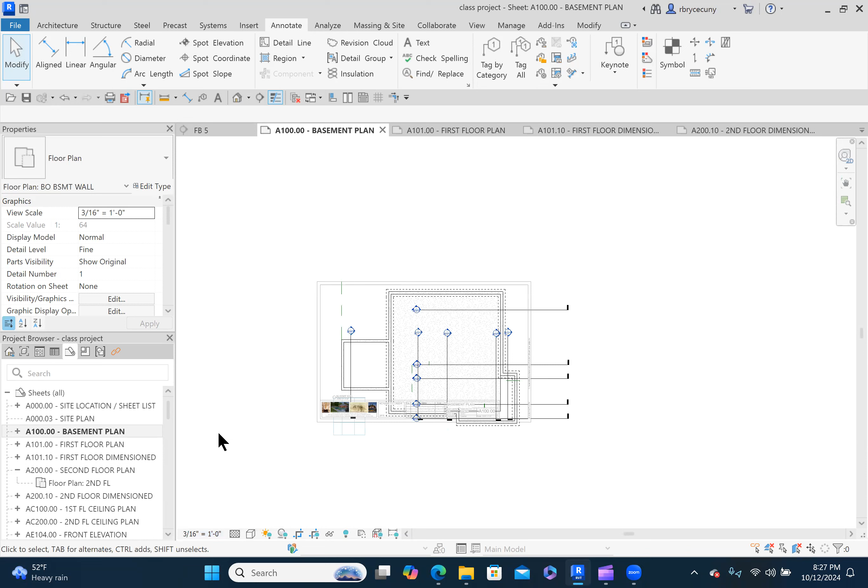So the first thing we need to do is activate the view so that we can make it smaller. So let's try 3/16. That's not going to work. So let's try an eighth. That will work. So deactivate the view. Raise that up a little bit. About to right there. We do have some cleanup to do because our section lines need to be

more organized. They're in the right location, but the ends or the beginnings, the arrowhead or the bubble needs to be outside of the building for sure. So let's do that. We activate the view. Let's grab this guy and pull him all the way over to here. And then we'll grab this guy. We'll pull him over and watch it snap.

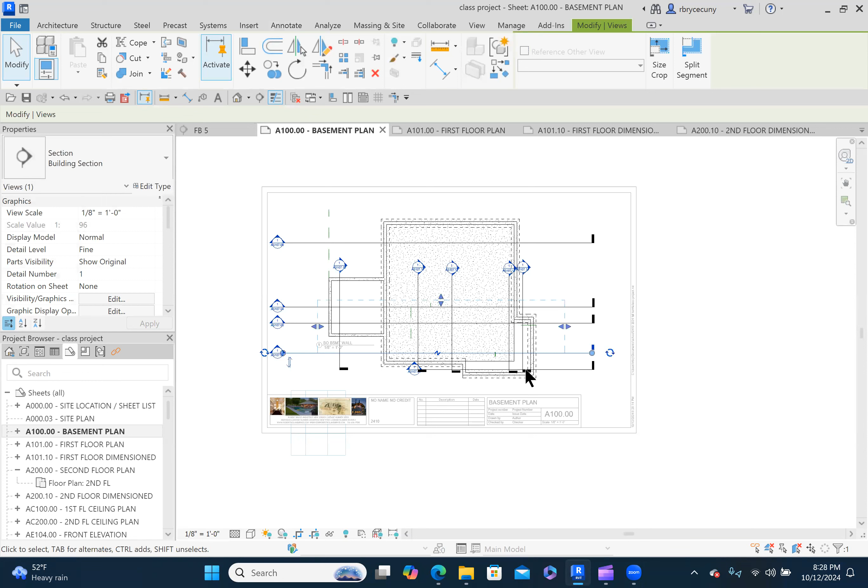See that little dash line there? So what Revit is saying is if you let me go here, I will be aligned with the one above. And we just grab that. And that looks pretty good. And just to be safe, let's pull these. Now we don't want to change the location of them other than just to extend the sections on both sides.

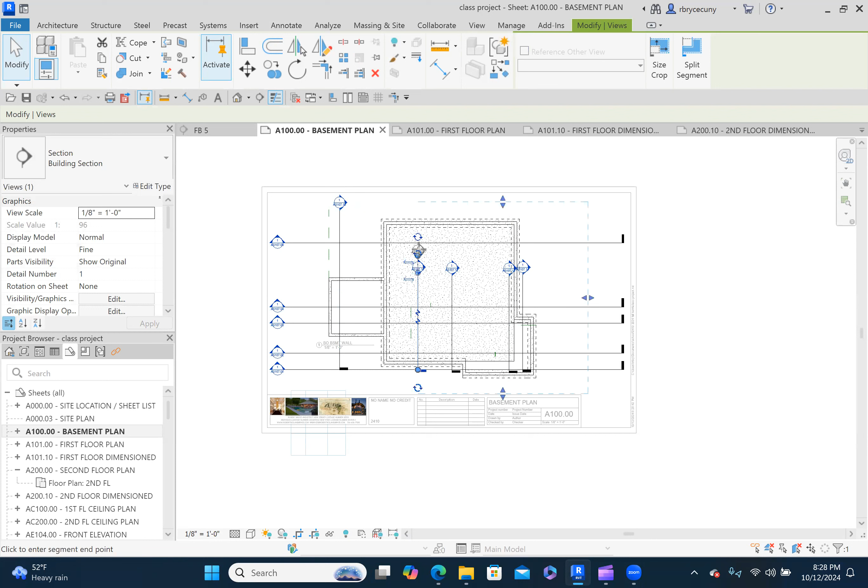So that looks good. And what about these? Let's do the same thing. We just select it and grab it. And let's get it up there as close to the edge of the title block as possible. Now let's see if this will snap. Sure does. And let's see if this will snap. Yes, it does. And we'll snap this one. Yep. And we'll snap this one.

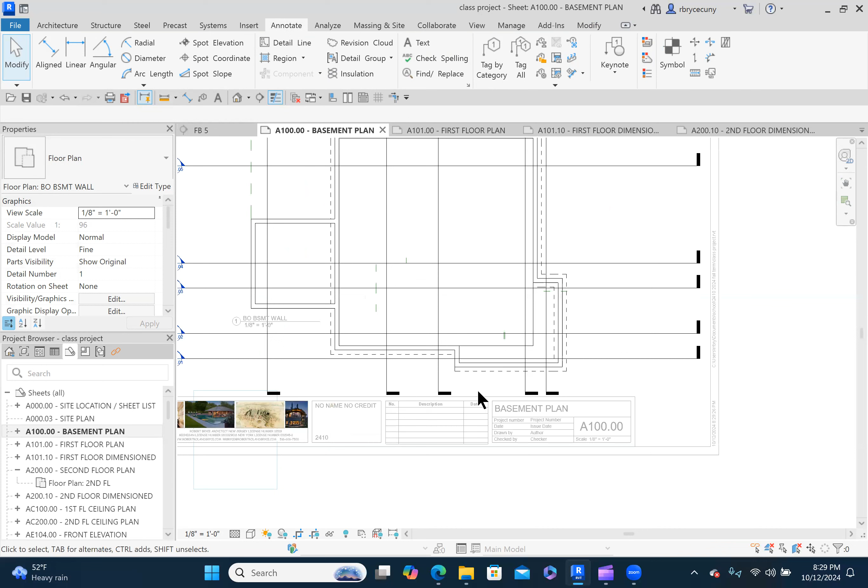Okay, let's see. We still have to pull the bottom down. So let's get that down as close as possible. It's all snapping to the previous one. If we just let go, it snaps right where we want it. All right, so that looks better. Let's just see if we have enough space here. Maybe we can deactivate the view. Just nudge it up a bit. Give us a little more space because we're putting in dimensions now.

So let's activate the view. And I want to put 3 rows of dimensions. One row is the overall. So we would say the distance from the outside face here to the outside face here. Then the offsets, which would be here to here, to here, to there. And if we had any windows or doors on the exterior, then the third, we would do that. But here we only have 2 rows. We don't have a third row.

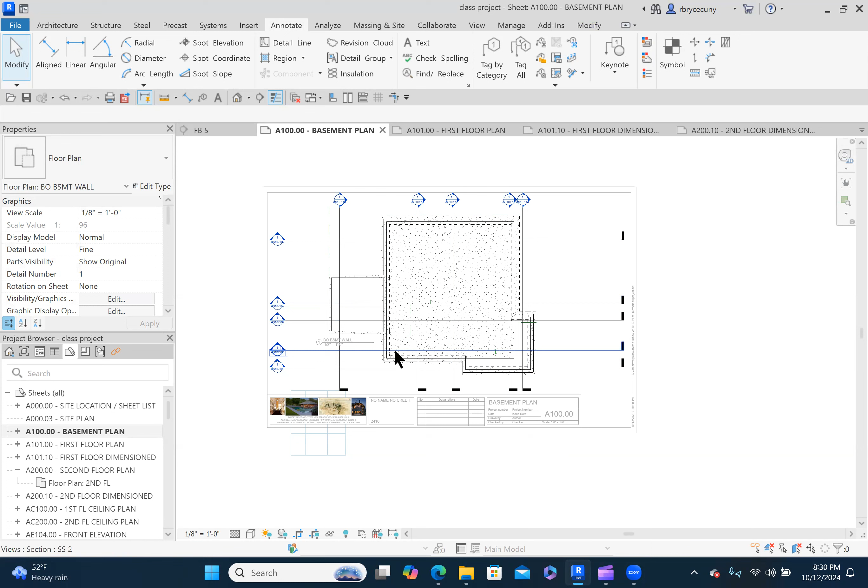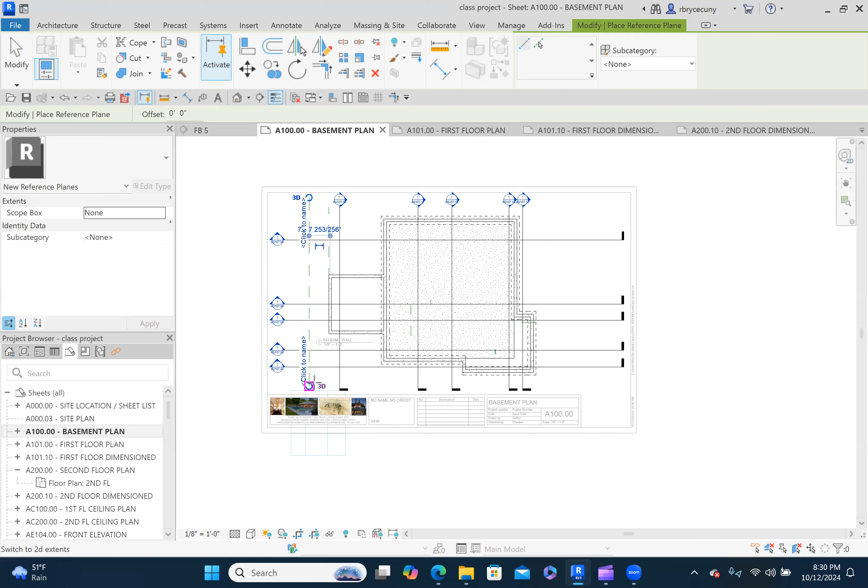So what I like to do is I like to actually put in reference planes. And that means that if I put a reference plane in here, it will show up on the first floor and it will show up on the second floor. And so my dimensions will line up with each other exactly. So let's do that. So let's put in a reference plane here. Okay. Now what's that distance away? It looked like 8 feet, but let's measure it. 7'2".

Okay. And now let's put another reference plane in here, which is also 7'2" across. So now we know that that's equal. And then let's do another one over here on this side. Architecture, reference plane. And we want that 7'2" again. From the farthest out, the dashed line is the footings. So we don't want that. It's on the wrong side of the imaginary line that I drew. So I hit the space bar.

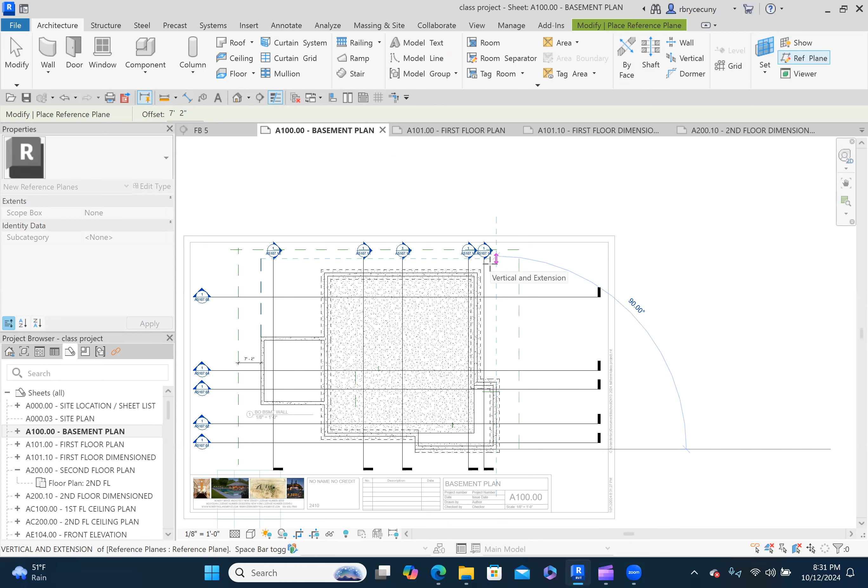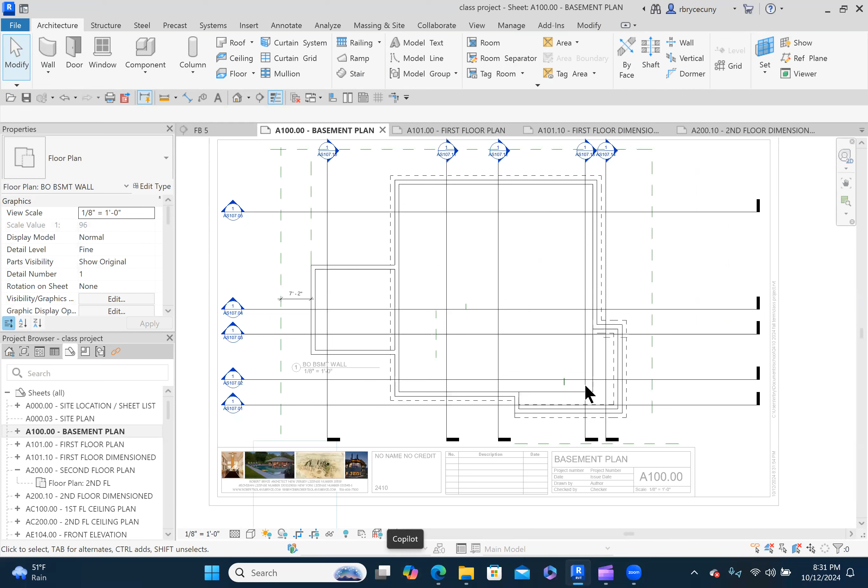And then we'll do the last one, which is 7'2" from the farthest outside face, which is here. Okay, and then I'm going to grab the end of it and just pull it across here. Okay, so if I do 7'2", it's a little bit tight there. Let's see if we deactivate the view and let's just nudge it up a little bit.

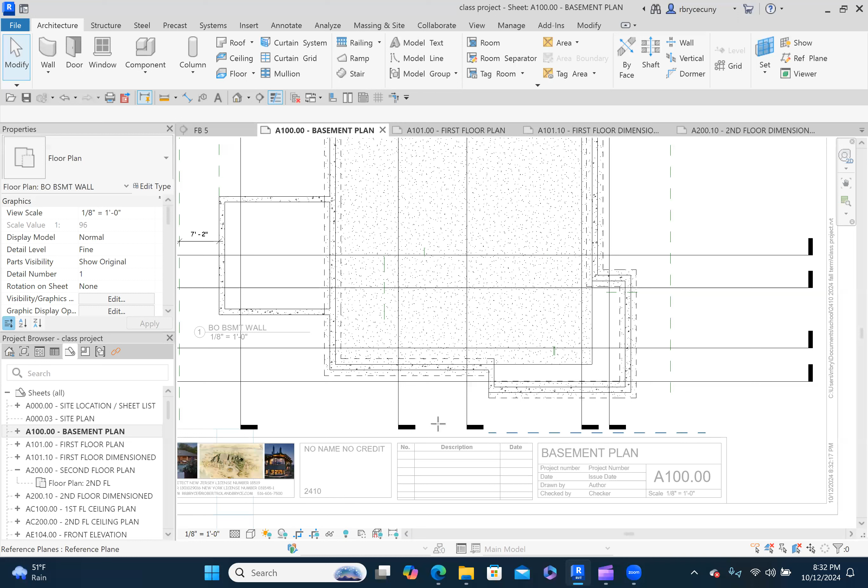Let's put it back where it was, leave it alone. Okay, so 7'2" is probably going to be my extreme outside dimension. That's about as far as I can get away from the house. So let's put those in.

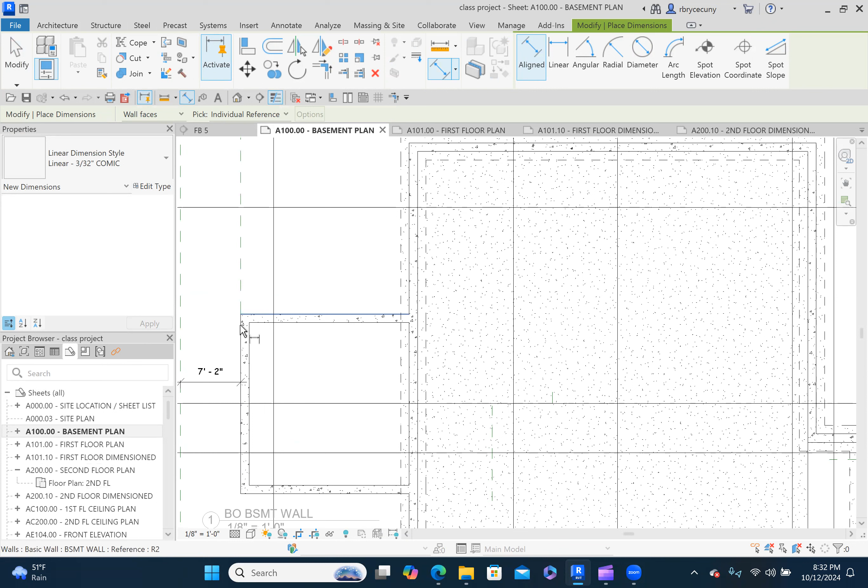We're on the basement plan. Well, I have it in my quick access toolbar. I have the dimension already. So let's pick the face. Don't pick the end here, because if you pick over here, Revit says, wait, do you want the end of this wall or do you want the face of this wall? So I always pick somewhere inside of the wall itself.

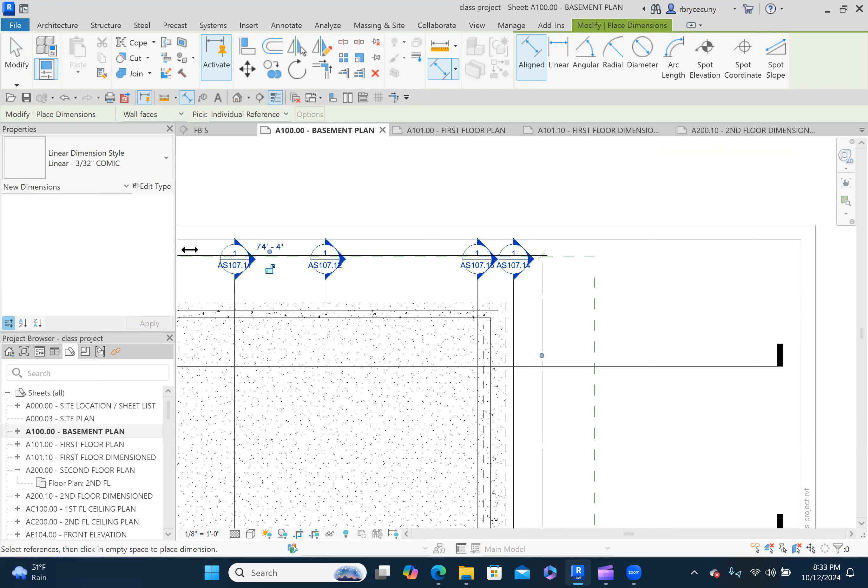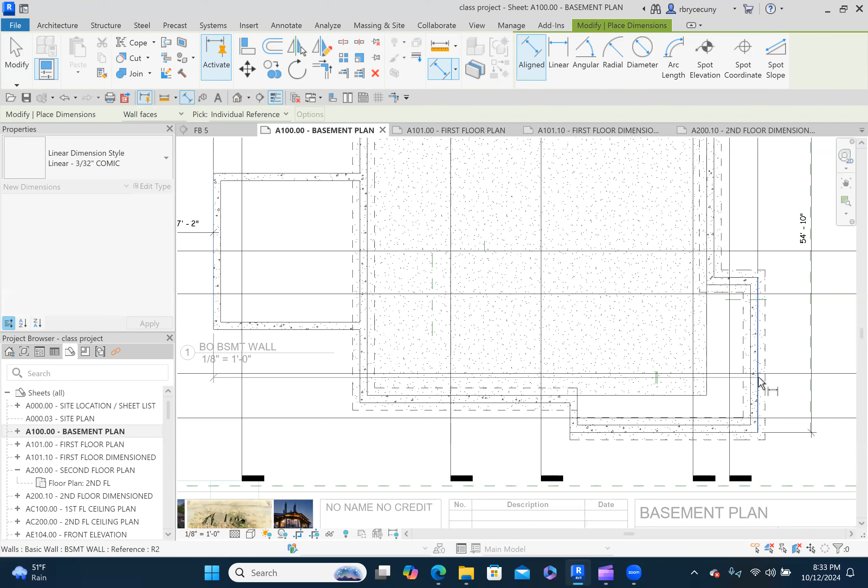And we know we're going to have a dimension that goes to there. That dimension is going to go on that as close as I can get it. So we got 74'4" in that direction. Now let's go this way. We're going to go from the outside face to whatever the extreme outside face is on this side, and we're going to try to line it up pretty close to that as well. We'll do the same thing again down on the bottom from here to there, and we'll kind of line it up with that reference plane.

This is a dimension we don't need, so we'll delete that. It doesn't tell the people trying to build the house anything other than how far away that dimension line is. Okay, so now that looks good. We're going to save it. Now we need to put in another row of dimensions, which are the offsets. So we'll go back again, dimension.

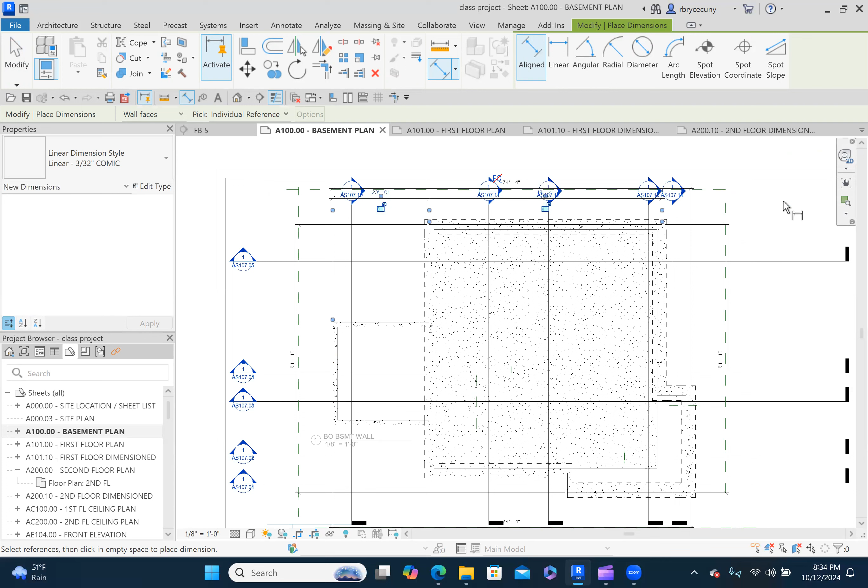We're going to pick this line and then this line. We're picking the faces and then this line. Now move your mouse up and Revit will snap to a distance away. So that looks good. Then we'll do the same thing over here. Pick this. Whoops, I didn't get the right one. So we're going to pick this one. And then we have a little bit here of an offset, and a little bit here of an offset. Now you just move your mouse over it. It'll snap to the same distance away from that.

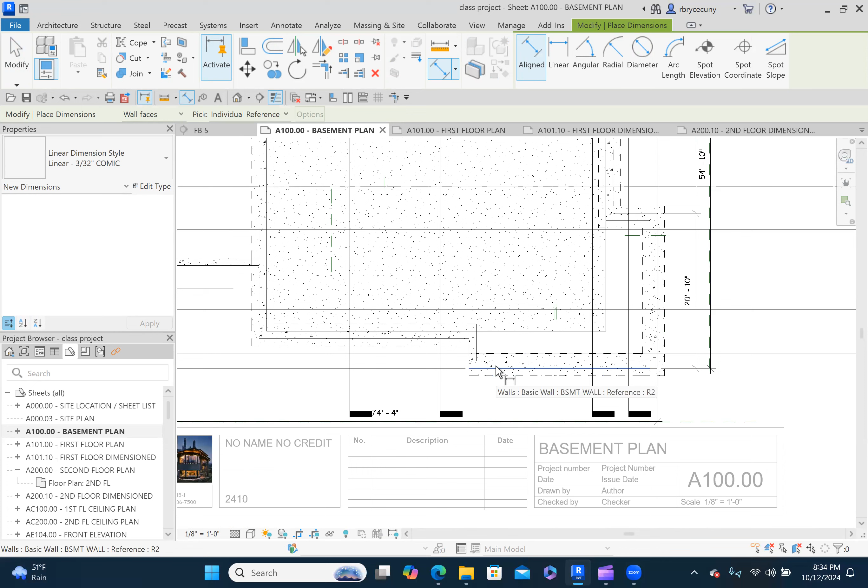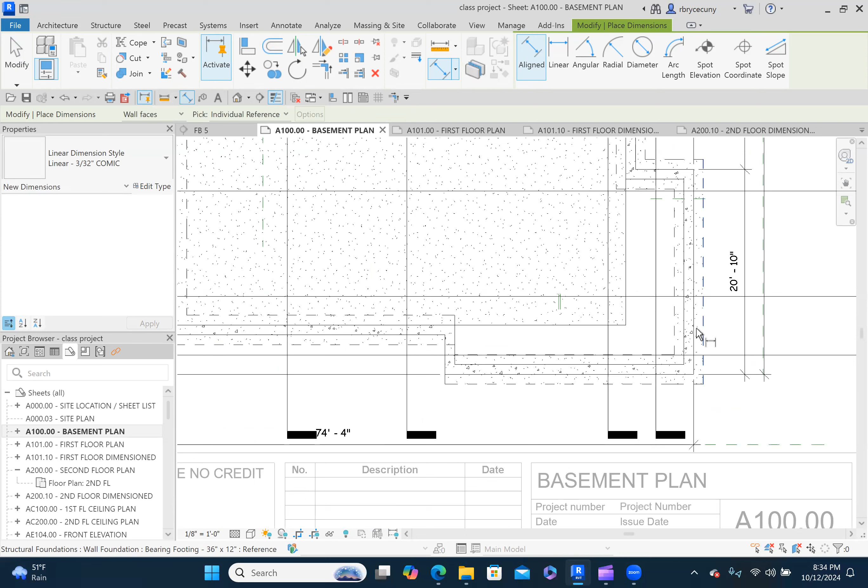Once again, we have offsets here, here, here, here, and here. And then I just move my mouse over there and boom, it snaps equal distance away. So I have my offsets, but I didn't get the bottom offset. So let's do that. 1, 2, 3, 4, and then we'll let it snap. So it snaps right into place. Save it. And now we have dimensioned our basement plan.

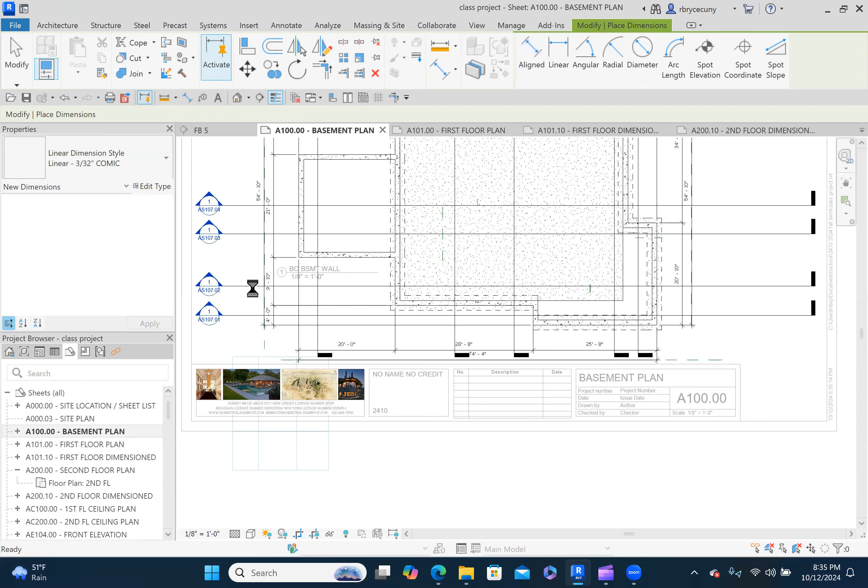And we have cleaned up our section lines. So that looks good. We saved it already. So first of all, let's deactivate the view and let's put in some grid guides. Okay, we could use the garage left, but I'm going to say bottom right corner. So I'm going to make a new one. We're going to call it bottom.

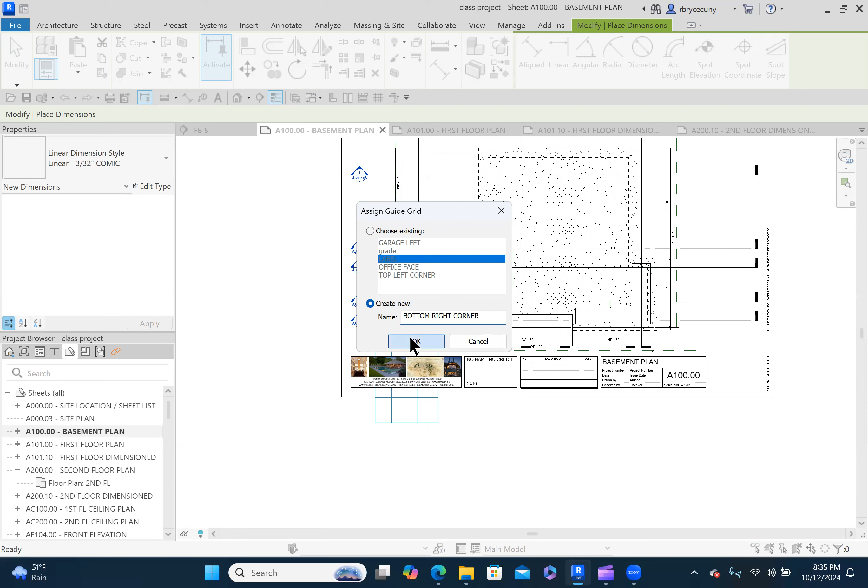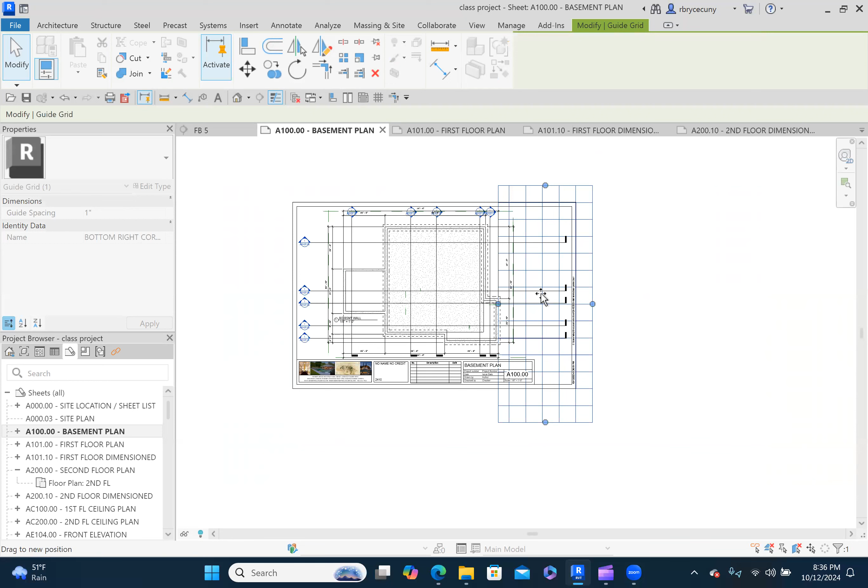And we'll modify this guy by tab. I couldn't get it before, so I had to use the tab key to tell Revit that it hadn't selected or highlighted the object that I wanted it to highlight. And then we'll drag this guy down to there and we'll line it up right with there. What we're doing is we're trying to get the corner of the house on each sheet to be exactly in the same spot.

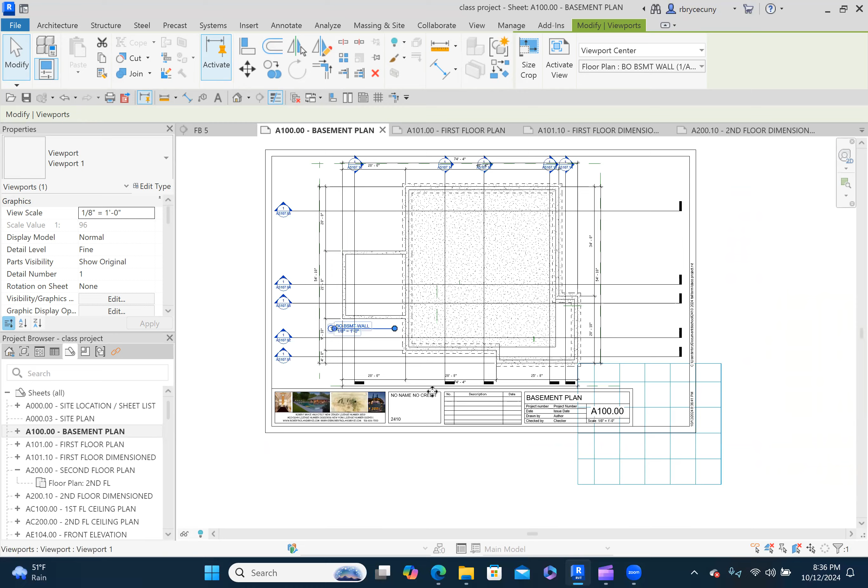Now, there should be a label here, and I'm not seeing one. There it is, right there. Okay, so we're going to go back and we're going to say label. Remember from our sections, we put that label in, and there's our label. We're going to put that right down here.

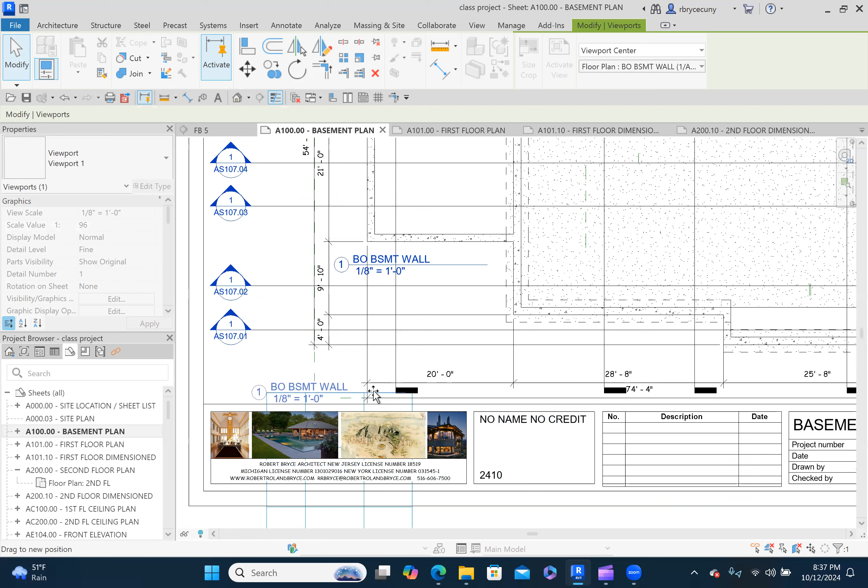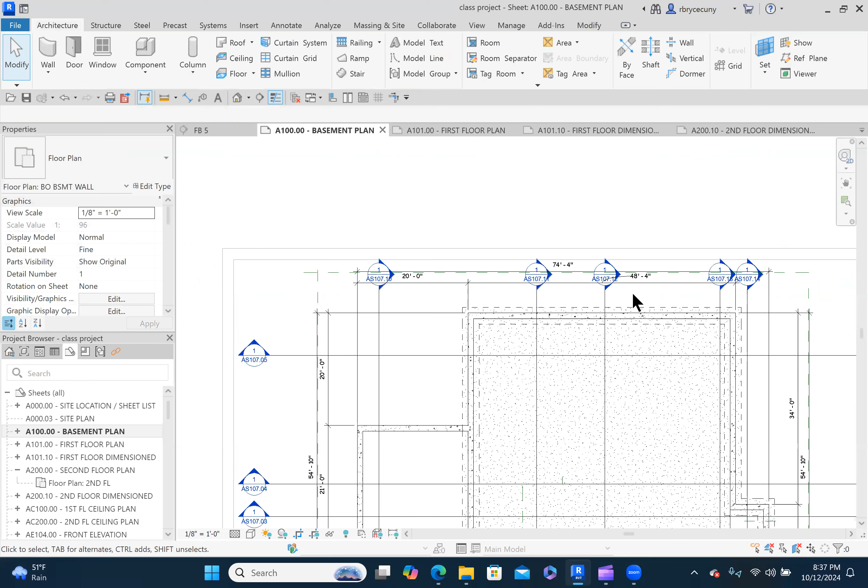Now, I did notice that there was a spot where the dimensions were on top. So let's fix that. We're not going to move our section, but we'll activate the view. We'll click on that dimension line, and we can drag this guy over to the right or to the left so that it's legible. Okay, I think all the other ones are legible. Yeah, we look good. Okay, save that. Now let's go to the first floor plan, the first floor dimension plan.

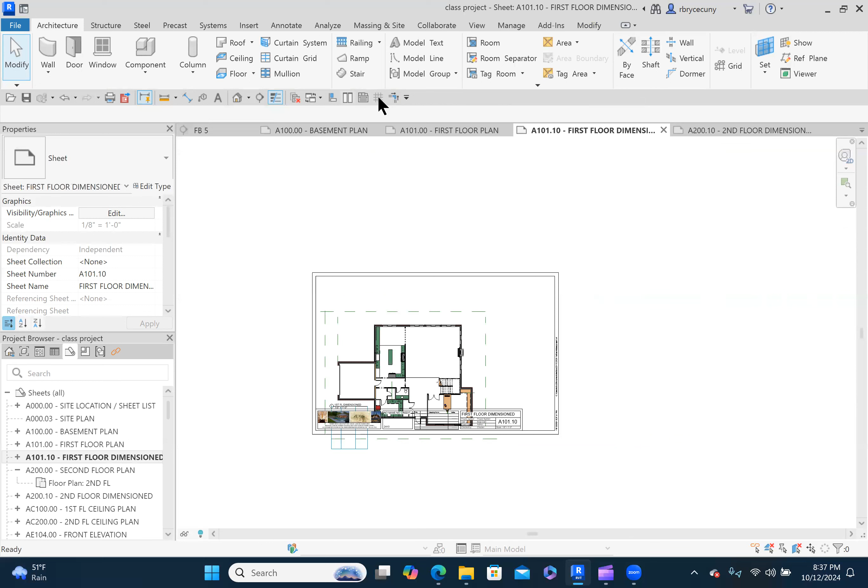And look at that, too big. So we'll activate the view. We'll change it to an eighth because we know that it fit in an eighth on the other one. And what are we going to do? We're going to deactivate the view and put in our grid guide, which is what? Bottom right corner. Say OK.

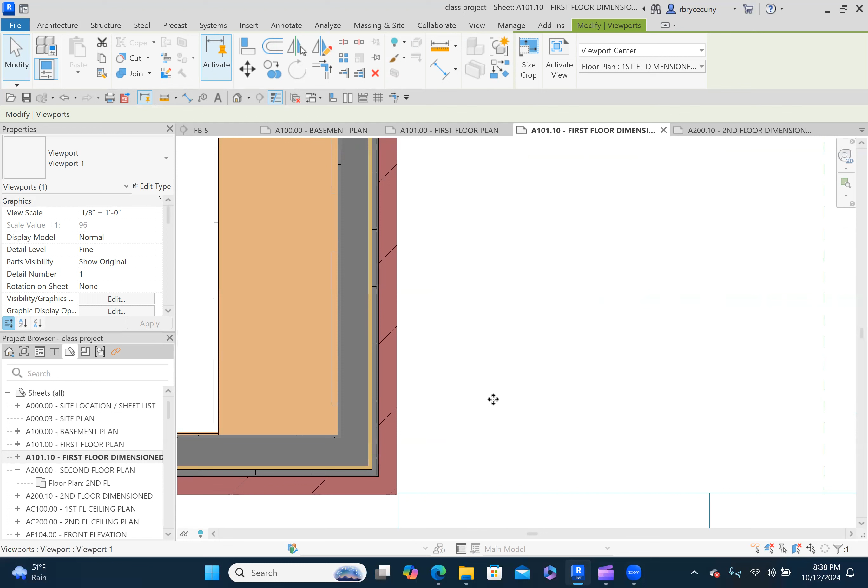And now I've selected that view and I'm just using the arrow keys on the keyboard. And I got it pretty close. And then I can zoom in, and there's just a little more precision when you're this close. Hitting the arrow key doesn't move it quite as far. So I think that's pretty darn close for this. And there's our grid, or our reference plane, so we can use those again.

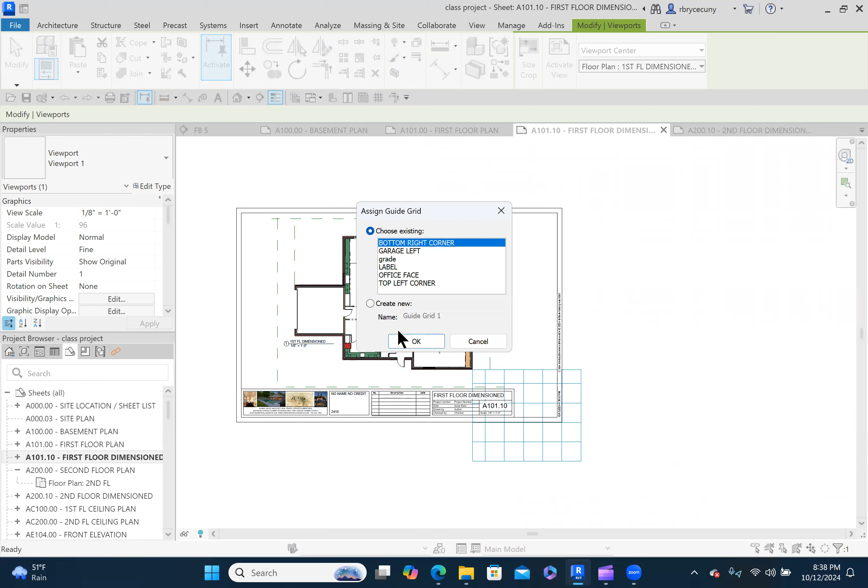And let's see, cancel. We're going to put our dimensions in now, and we're going to line them up here. So we have an overall, which would be the outside face of the brick. Oh, activate the view. Okay, then we'll put our dimension in. It wasn't activated. The view wasn't activated.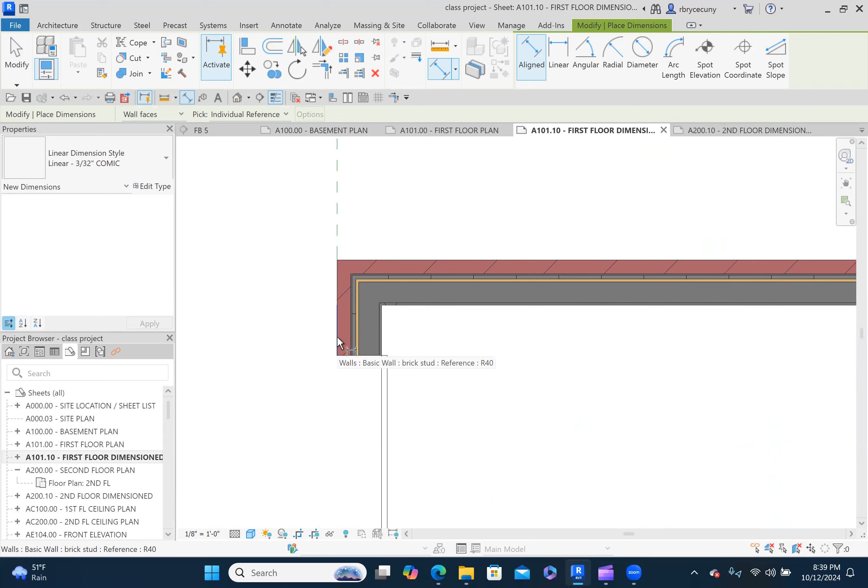Now, don't click here. This is the end of this wall. Sometimes you'll get it right, sometimes you won't. But when you come down here, Revit has a higher probability of selecting what you really want it to snap to. And our dimensions will go here.

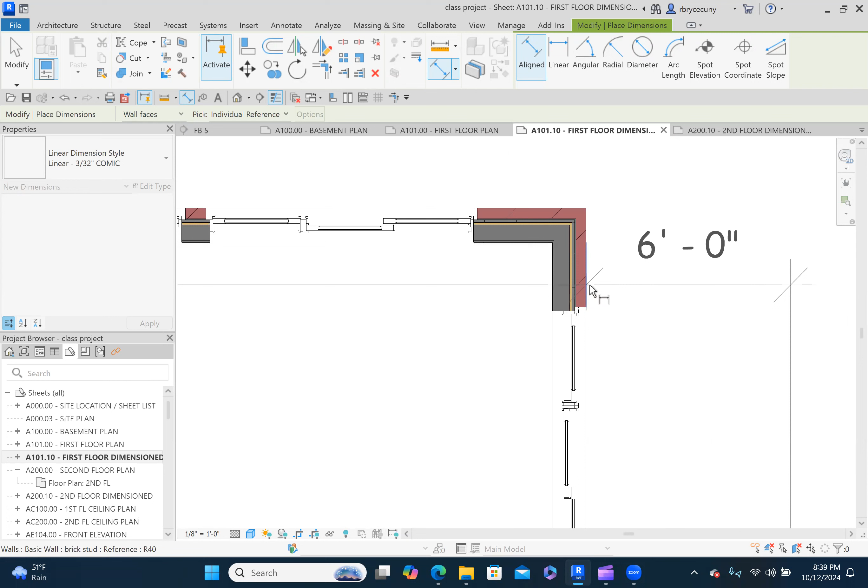And let me go all the way over to here and say, wait a minute, you missed one. Well, look at what happens. If I click here and then I click here, Revit says, it's all right. You don't have to put another one. You don't have to go and start over again if you didn't do it perfectly in order. Revit will figure it out. So we'll line it up there.

Oh, and I did that wrong. That's our offsets. So let's just pull this down for now. I like showing mistakes because other people make them too. And sometimes it helps. So I could delete that and start over again, but I don't have to. I just put the wrong dimension right here on the grid guide, on the reference plane, which I shouldn't have. So let's do it again.

But this time we'll do the overall from here all the way over to here, and then come up and line it up on that reference plane. Now, this is why I didn't have to erase it. I'll just drag it up. It's still going to snap. Watch. You know, it snaps right to the right location.

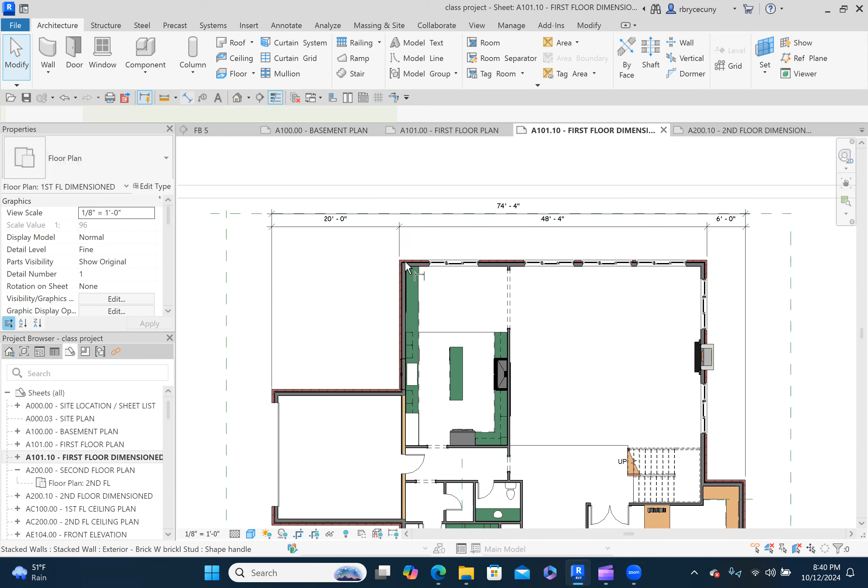Now here we have another row that we need. So we have our overall, which is the extreme left to right, then our offsets. But now we have another row, which is the center line of the doors and the windows. So here, and most doors and windows will snap to a center line, and then to here. And then watch this, we'll go back up, it'll snap to the right location.

So these dimensions don't have to be, and probably will not be, even inches. And that's okay, because we're concerned about the basement guys putting in the basement to even inches. We're not concerned about carpenters; they can figure that out. Their tape measures have these divisions on them. So do the basement guys', but they won't generally, unless you're talking about a commercial project. They're not going to deal with anything closer than 2 inches.

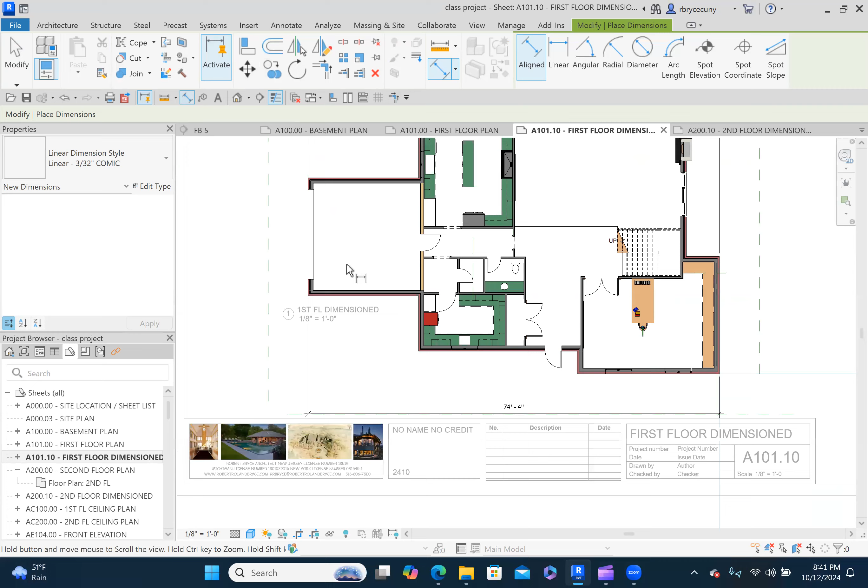So let's do it down at the bottom. From where? Well, we'll do the overall first from here. So we'll go all the way over to here and then line up with this grid guide, or I'm sorry, with the reference plane. And then we'll go back in and we'll put our next one in, which is our offsets. And then we just come down here and it'll snap. Watch, look how it snaps.

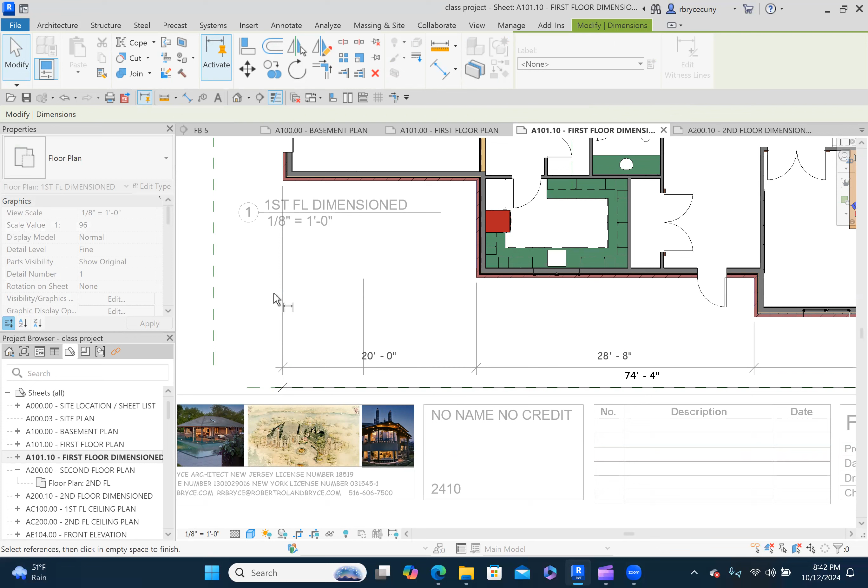So once we have our outside, well, look, I missed that one. I missed one. So we don't have to erase and start over. We'll click on this, edit the witness line, simply click where you want it, and then come back and click anywhere outside of an object, because you don't want to select another object, and it put that back in for me. So I've got some windows.

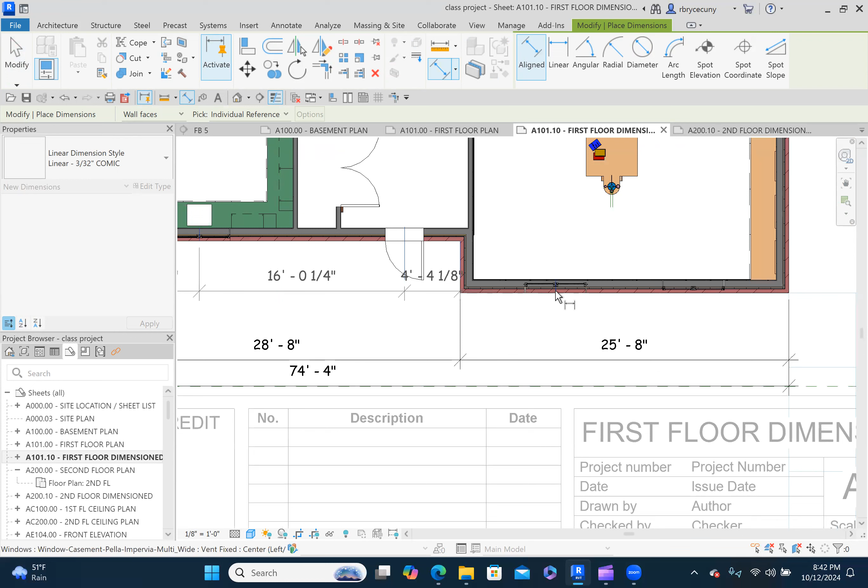That will be my third one, and it'll snap to the center line, snap to the center line of the door, snap to the edge, snap to the center of the window, and to the center of the window, and to the edge. And watch, it'll come down and it snaps right in place. So we have two more

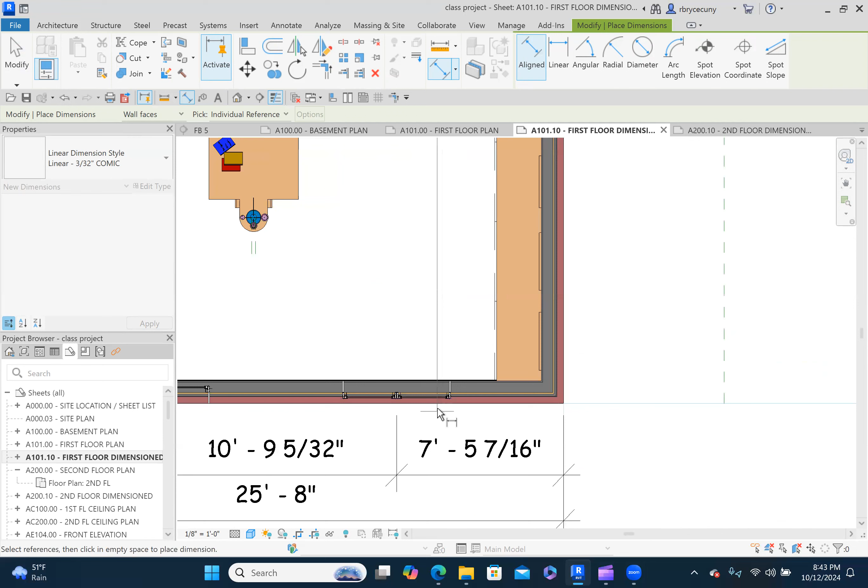sides. So let's do our overall first, from here to here. And where does that go? Right on top of that grid guide on that reference plane. Then we'll do the next one, which is from the face of the brick. I'm going to do it all the way to the back first, just to illustrate again. Right now I have that overall, but I can click here. Revit is smart enough to know to add another dimension in there, and it just snaps right in place.

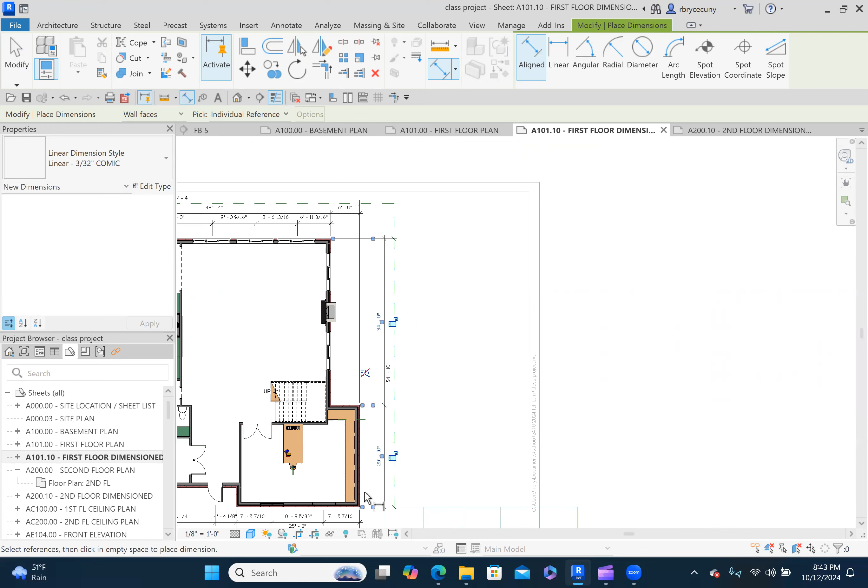Now I don't have any windows here, so I don't need to put an overall. As I didn't have any windows here, I didn't need to put center line, but I do need to put here. So let's do it. Here, snap to the center, snap to the center, and snap to this edge. Now, where does it go? It'll snap right where I want it to be. Okay, so far so good.

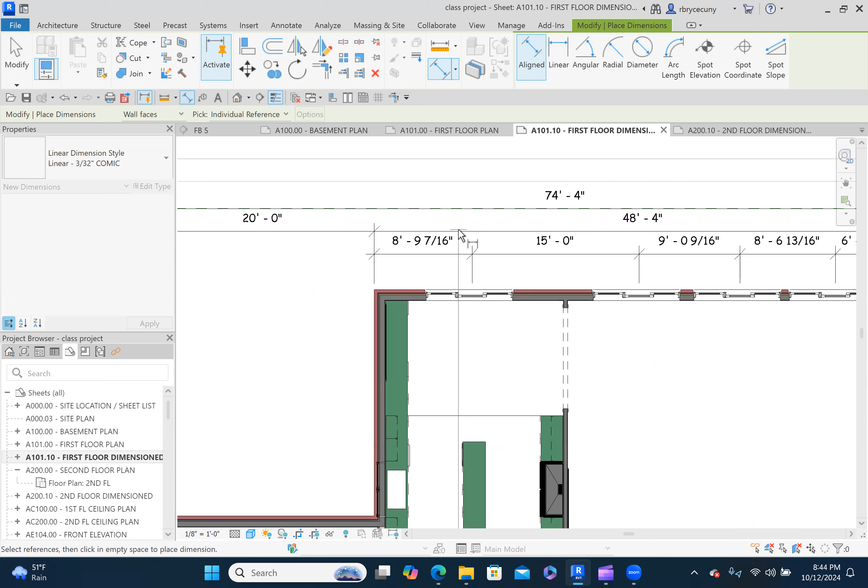One more side. I do have a window here, and I do have a door here. So let's do the overall first, which is the face of the brick to the face of the brick. And then we just kind of get as close as we can to that reference plane. We'll put another one in, which we'll call our overalls. Look at that, I went to the wrong spot. Let's see if we can drag it over there. Sometimes this is the one you drag. And in this case it was.

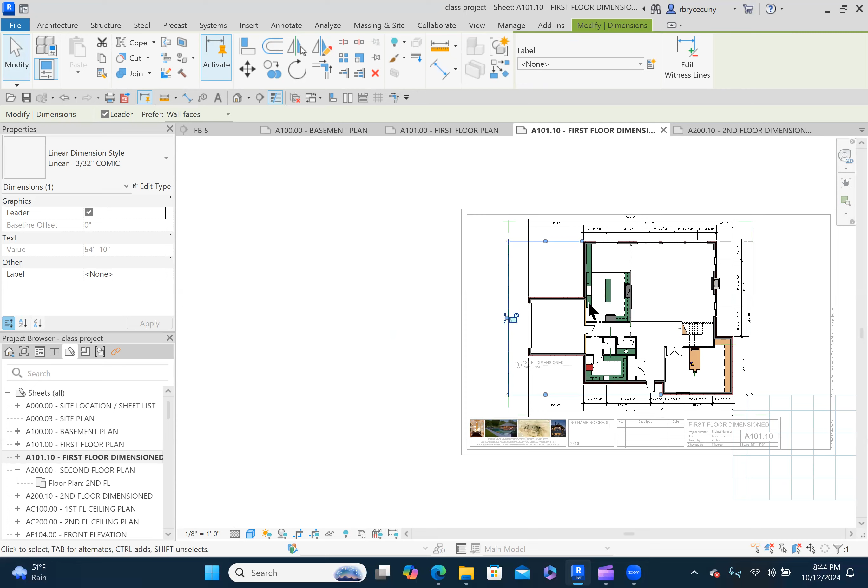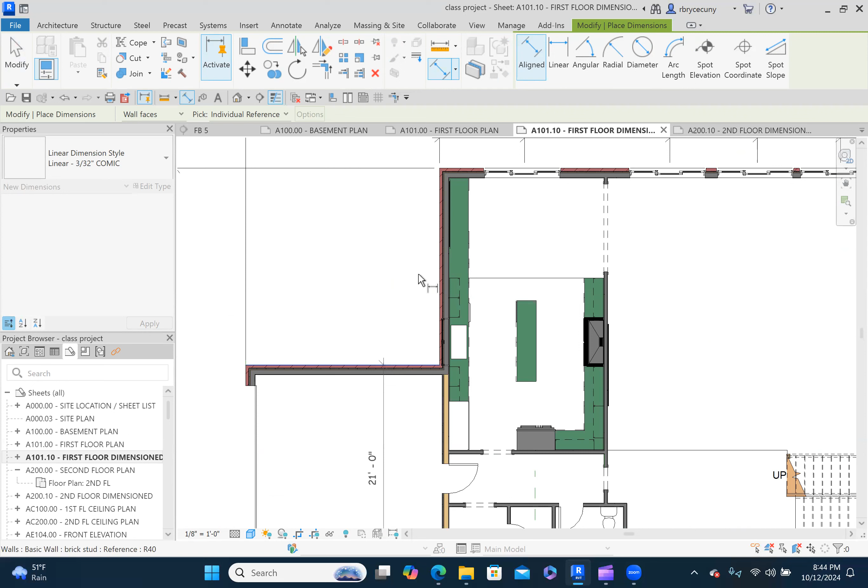And this should be the same as that, just to double check. 54 foot 10. 54 foot 10. Okay, so I did drag it to the right location. You don't have to redo it. If you're getting paid by the hour, then maybe you want to delete it and redo it. But if you're spending your precious time, you want to be as efficient as possible. And Revit allows you to go back and modify without starting from scratch on your dimensions.

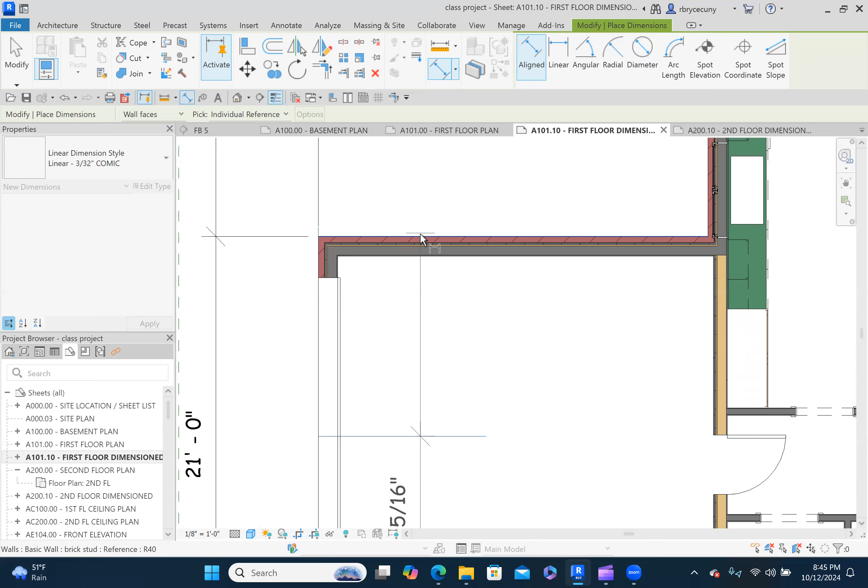And then I don't have any windows here, so I only need to put my third row, which is the center line. See, it'll snap to the center line and to there. And I have a window here, so let's snap to that window. And I have an edge here. Now, did I miss anything? No, it looks good. So we just let it snap to its right location. And there we go. We have another one in there.

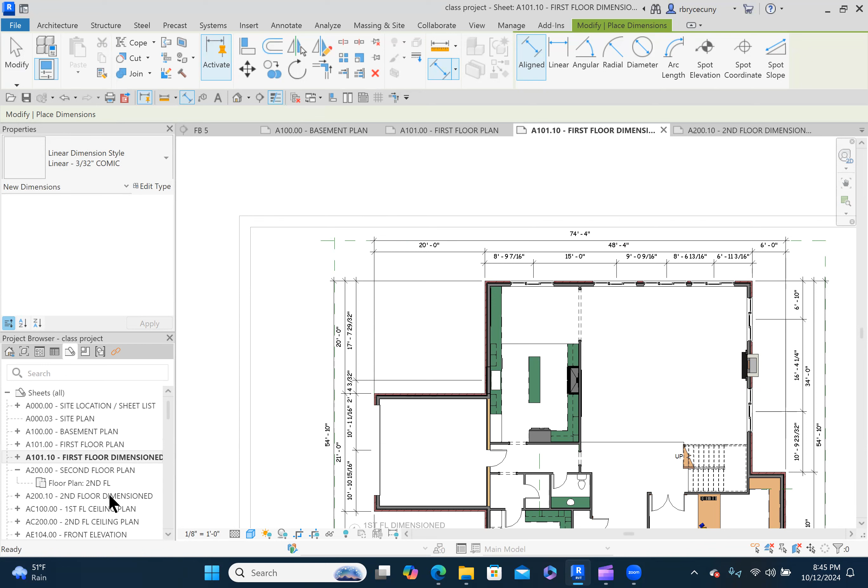So let's finish up our dimensions with our second floor. We're going to go to our second floor dimension. Way too much information there. I think something might be turned on. Activate the view. We might have an underlay here, so let's see if we do. Sure enough, our underlay is our first floor, so we're going to change that to none. We don't want to see the first floor. We only want to see the second floor. We're going to dimension the second floor. And we don't have all the windows in yet, so we might hold off on that.

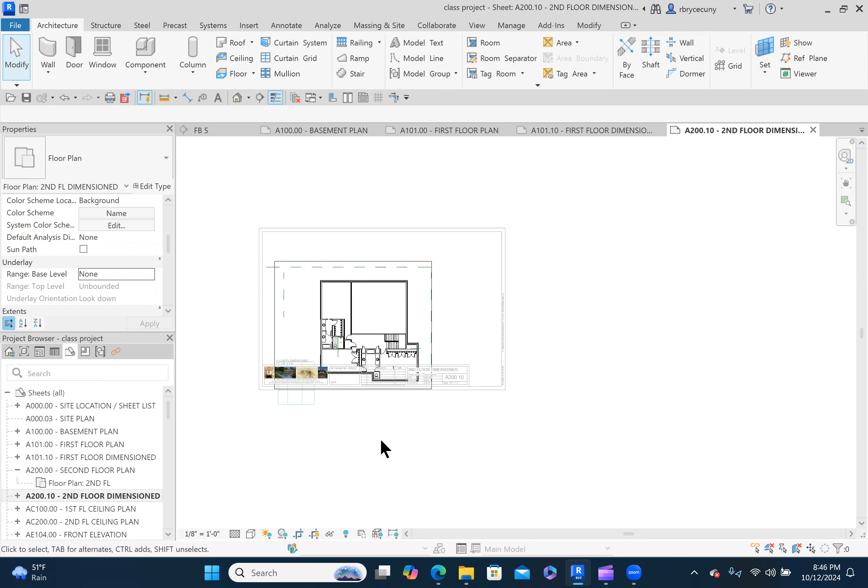But we also know that 1/4 inch doesn't fit our sheet. We do know that 1/8 does. So let's get rid of the crop region. That's this little guy right here. Hide the crop region. And then deactivate the view. And we'll move it up a little bit. Move it over a little bit.

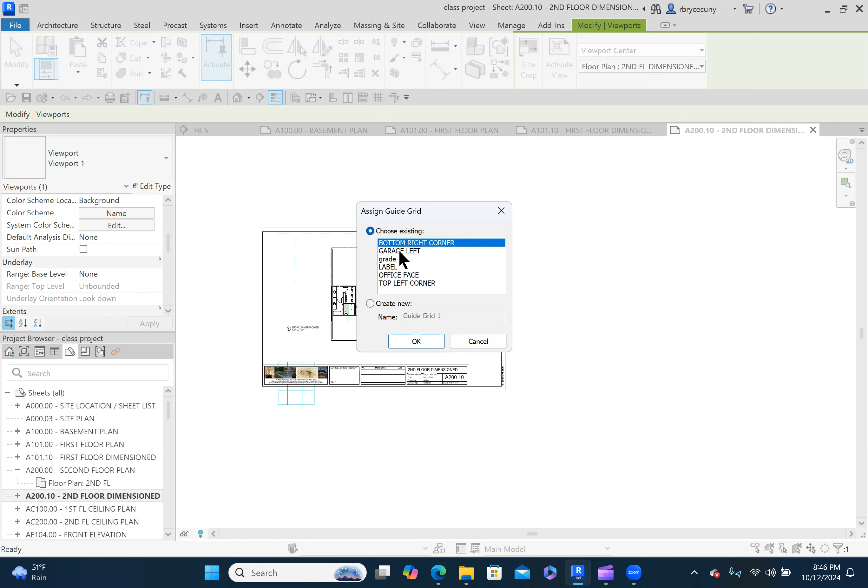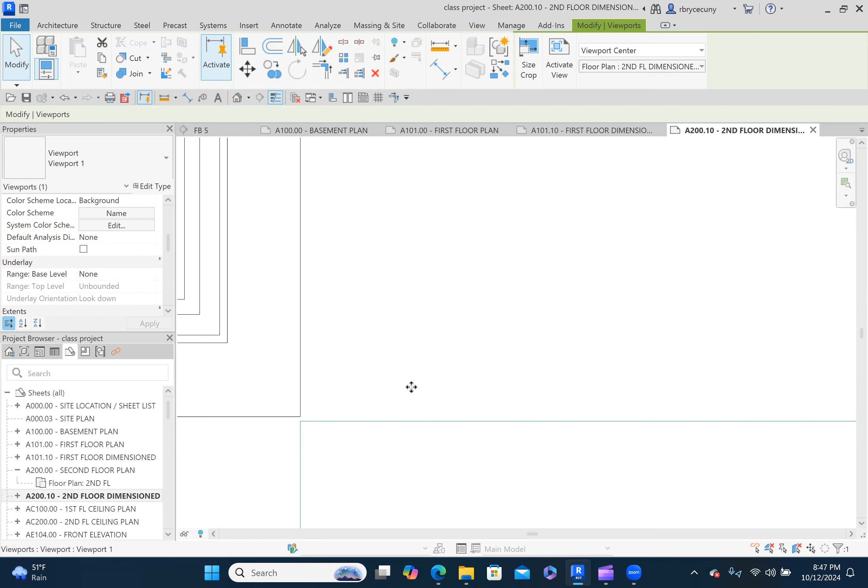And then we'll use the guide grid bottom right corner. That's where this corner should be, so we can nudge it over, nudge it down. Let's zoom in a little closer, see if we can get it more precise. Yeah, pretty good. If we want to really be precise, we can zoom in a little closer. I think that looks pretty good.

All right, what did we forget to do on the first floor dimension? The label. There it is. Let's deactivate the view. I forgot to fix the label, so let's do that while we're at it. Label, okay.

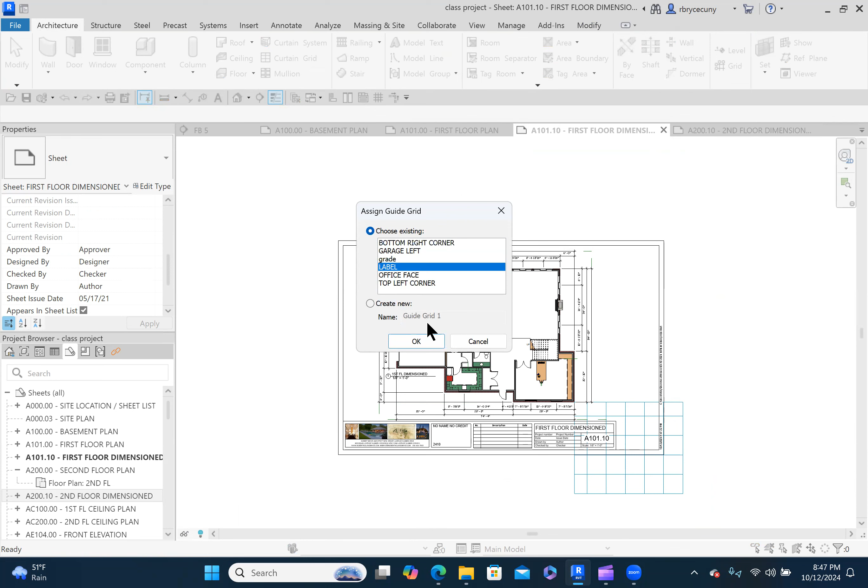And then I can just drag this guy right down on top of there. Back to the second floor dimension.

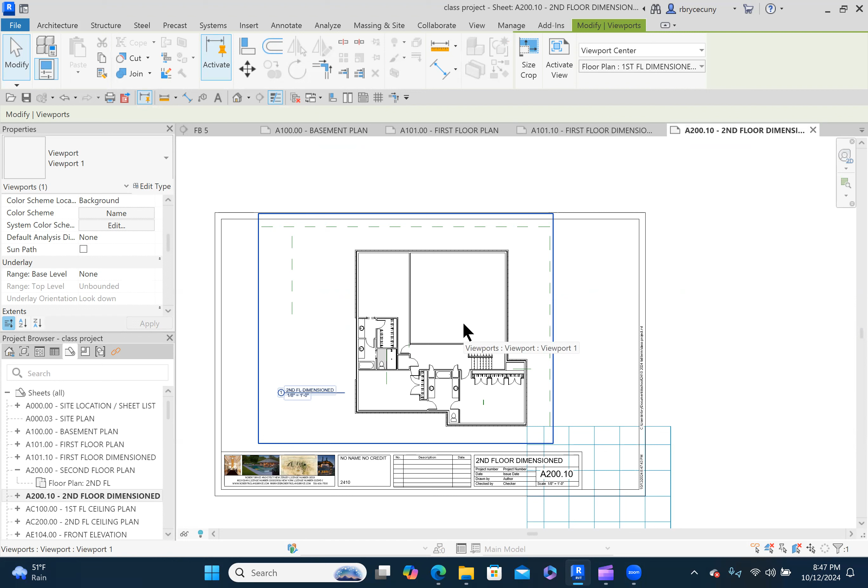So I'm not going to put the windows dimension in yet because I don't have them. Look at how far away this one is, because that's outside of the garage, which is below. We don't need to dimension to the garage.

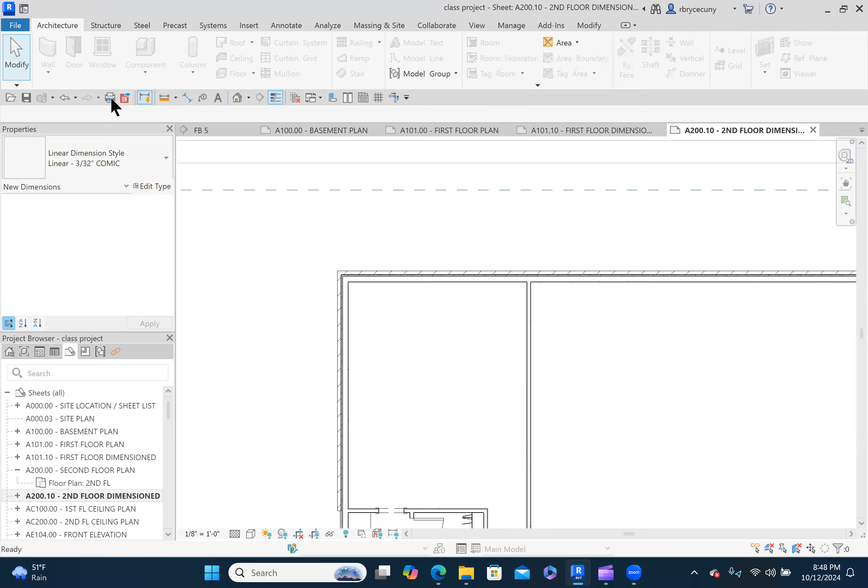But I'm going to leave that as my line where I want to put my dimensions. So we'll do the overall, activate the view to put the dimensions in. So we'll go from here all the way over to here, and then we'll line it up right there on that reference plane.

We do have offsets, so we'll do that now, but we'll come back later and put in the windows dimension since we don't have them in. Let's watch it snap. Snaps right to that point.

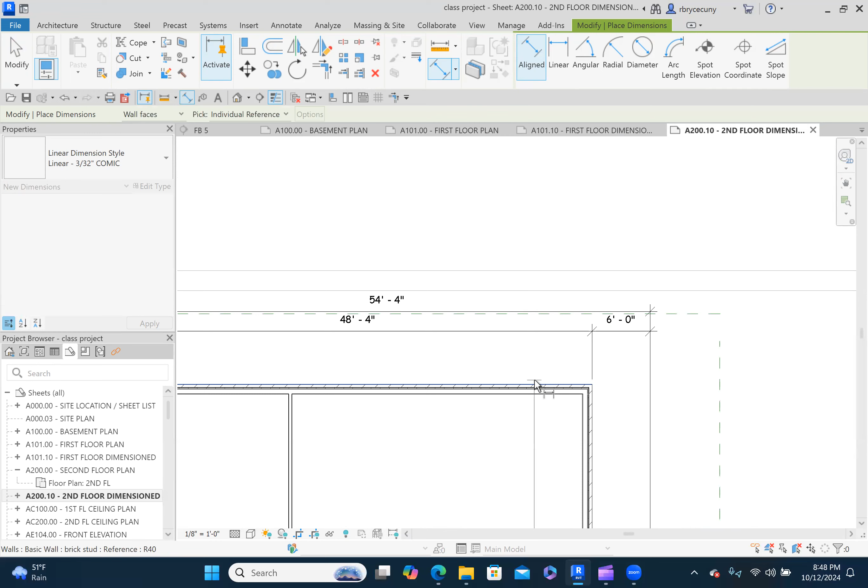Another overall from here to here. We'll line up with this reference plane, and then we'll come back. We'll go from here. These are overalls. No, these are offsets. And we'll move our mouse over there. It'll snap right in place. That's where it should be.

Now, where is the reference plane down there? I don't see it. I see this one, but I don't see that one. So we'll have to figure something out.

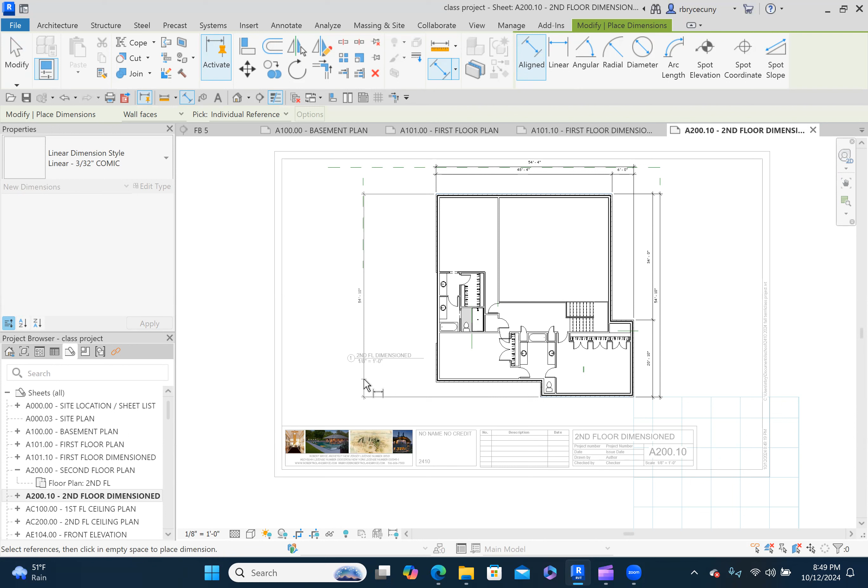Let's get this, and this would be our overall. We're going to snap to the outside, so it's still going to be the same. Our dimensions are going to be in the same location. And then we'll go from here to here to here, and we'll snap to that one.

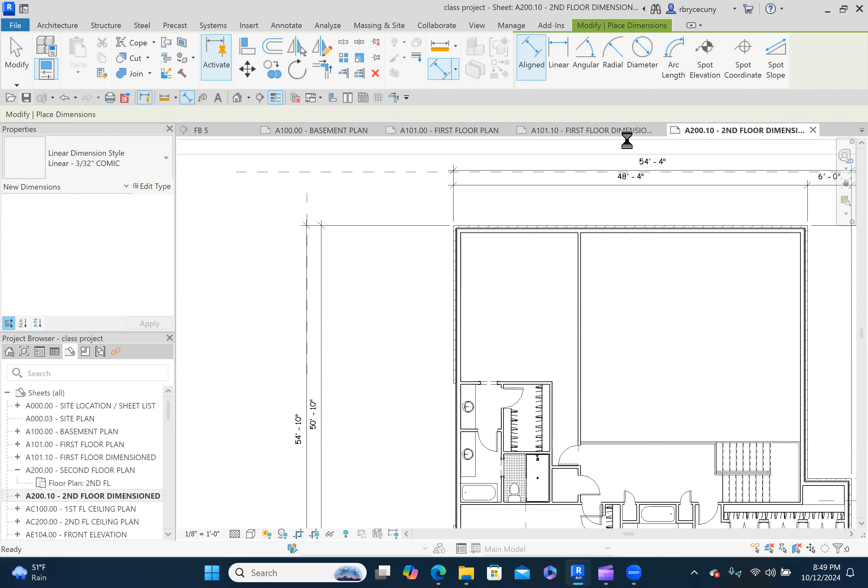Now, where did that other reference plane go? Let's go back to the first floor plan. We don't have our section lines there, so we'll go to the first floor plan here, which does have our section lines, and I can see that reference plane goes through that section line.

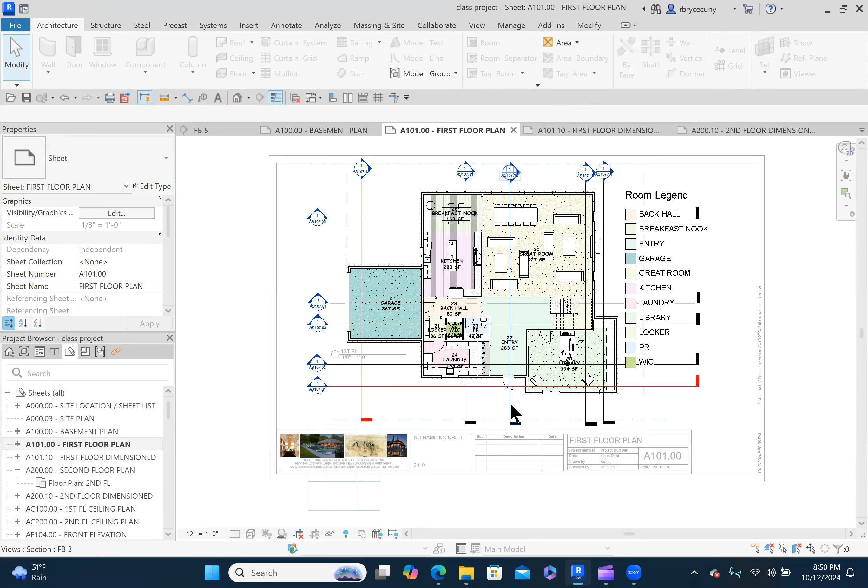So I'm going to activate the view, and I'm going to go to that view and see where my reference plane is and why it's not going up enough for me to see it. And let's change to hidden line.

Maybe, I was thinking, well, maybe the reference planes aren't turned on, but I see this one. So I should be able to see that one over there. No, it's over on this side.

Where's the front? This is the front. This is the front. So we should see that reference plane here. And we don't. So let's see. Let's hit reveal hidden elements.

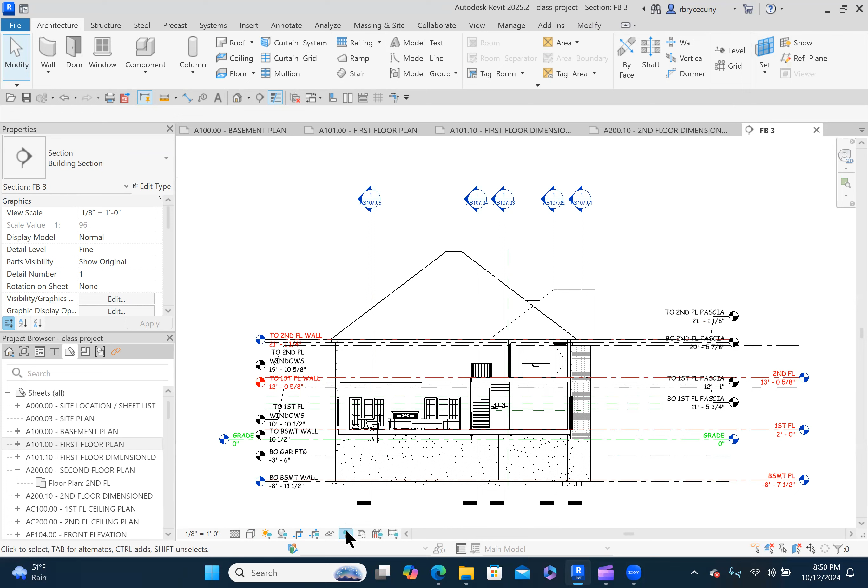See, maybe that's, oh, look at that. The crop region wasn't showing enough of the house for us to see that reference plane. But what I was concerned about was that that reference plane wasn't all the way up there.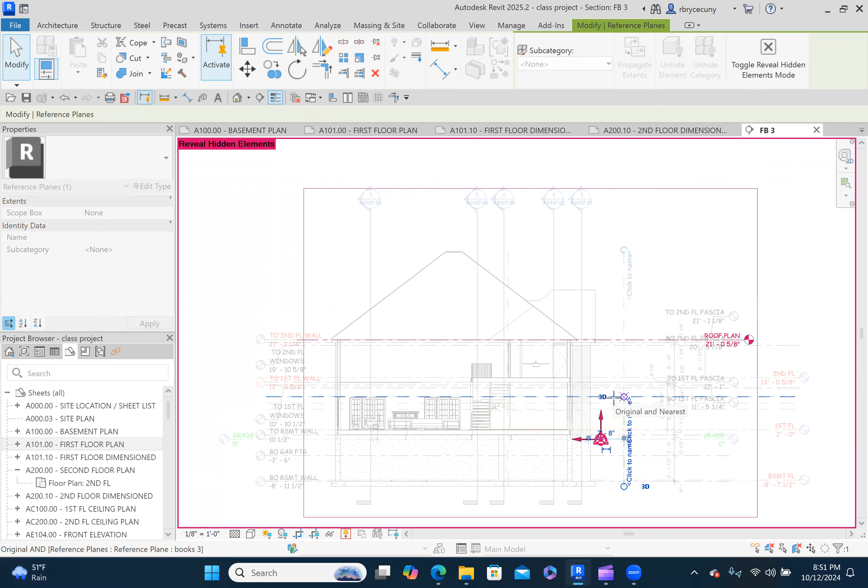So if I drag it down to here, it doesn't go through the second floor. We wouldn't see it on a second floor plan. But I'm going to put it back up to there. Second floor dimension.

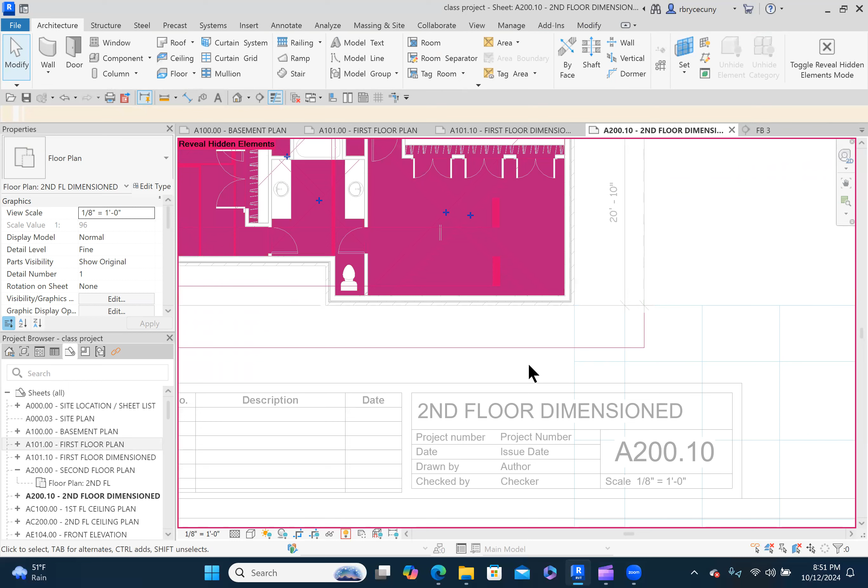And maybe it's turned off here. Okay, so let's click here. And again, it's outside of our crop region. So that's why we couldn't see it.

And there it is now. So I'm going to click this close, reveal hidden elements, and that's why we couldn't see it, was because it was outside of the crop region. We told Revit, don't show me anything outside of the crop region, but I wanted to see this, so I needed to extend the crop region.

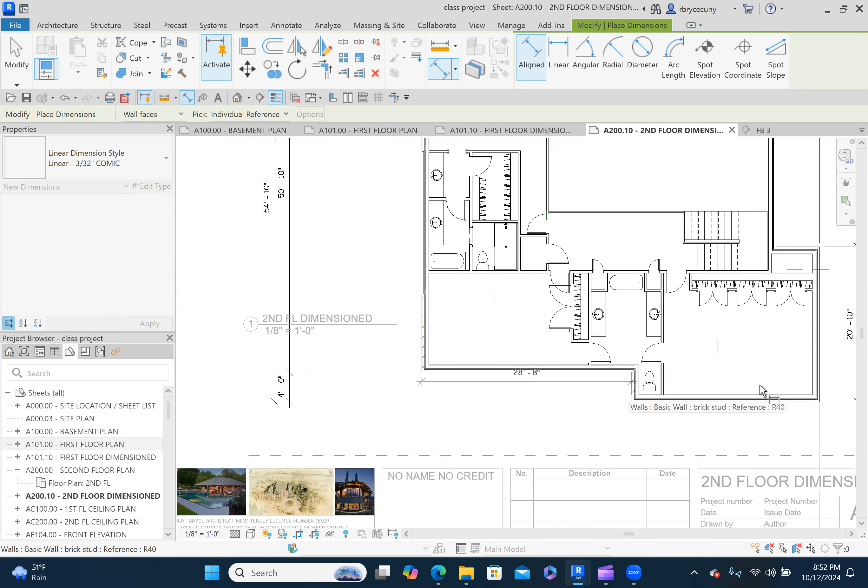I like that. That was a good one. So we're going to go from brick to brick to brick. And I just did an offset, so I'll just put it right there. Instead of the overall, which will be from here to here, this is the one I want to line up with my reference plane. And then I will drag this one and it'll snap.

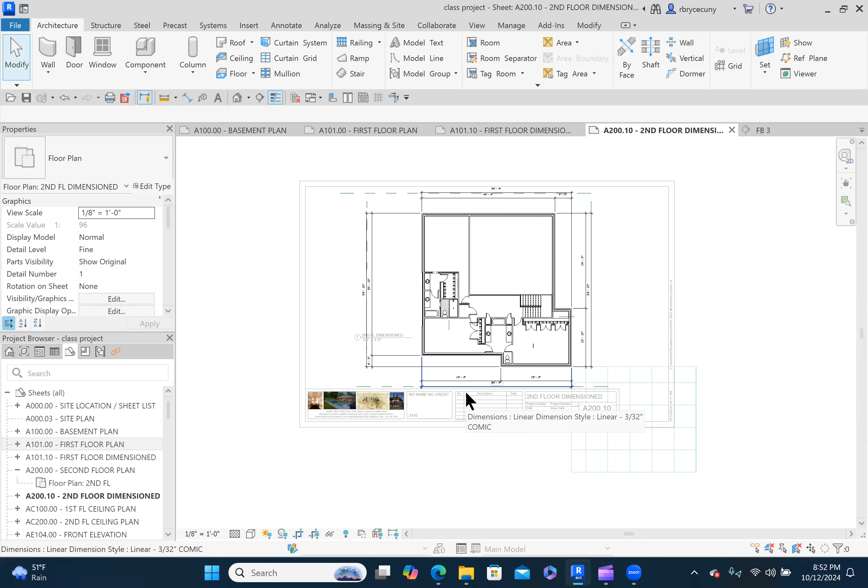Snaps right there. So hit the save button. When we come back and put in the windows on the second floor, then I'll have to come back and dimension it so that if the carpenter building this house needs to know where the center line of the windows are. So that looks pretty good.